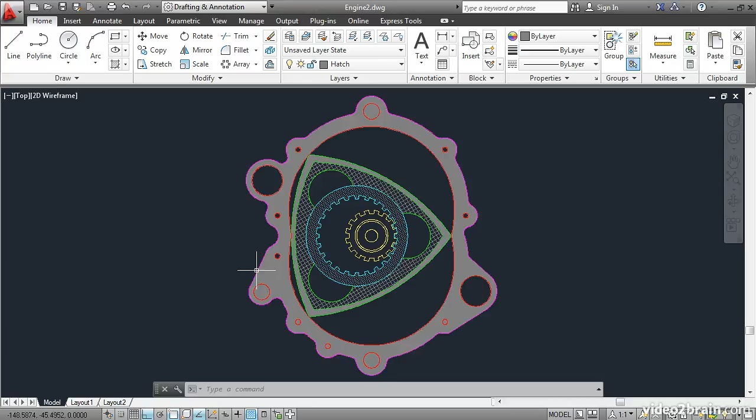Here you will edit existing hatch objects by selecting new boundaries, changing patterns, adjusting pattern scale, and setting the origin of a pattern. Open the Engine 2 project file and select this outer boundary. It appears that we're missing some of the circles. Let's reselect the missing boundaries.

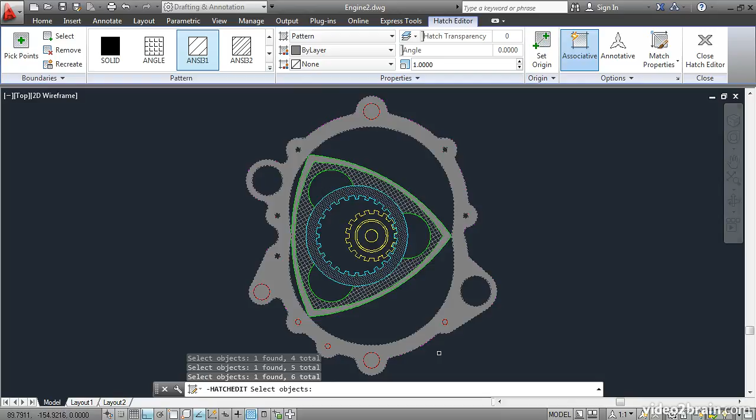Click Select, and then go around and select any of the circles which aren't part of the pattern. Note that you don't need to select the existing boundaries, just the additional boundaries. Press Enter, and the holes are cut in the pattern.

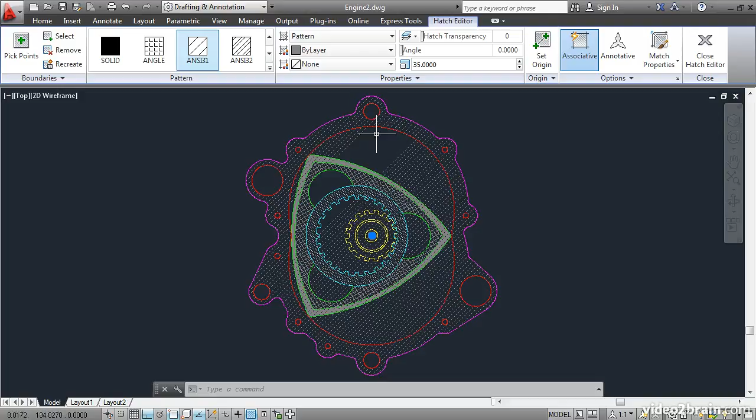The next thing I'd like to change is the scale of this particular pattern. It's way too dense. Go up here and highlight this value. Let's increase it to 35. Press Tab. Now look at this, we have a problem. The hatch pattern isn't respecting this inner boundary.

This inner boundary is composed of two circles and two blended curves here and here. There aren't any gaps in the boundary, so this is really a bug in AutoCAD. This happens from time to time with complex boundary shapes. The solution is simply to change the scale until the problem goes away.

I'll click on this Hatch Pattern Scale up arrow, and hopefully at some point, there we go, the boundary will be corrected. A value of 53 seems to work pretty well here. Let's change the hatch pattern next. Choose ANSI 32 for this steel pattern.

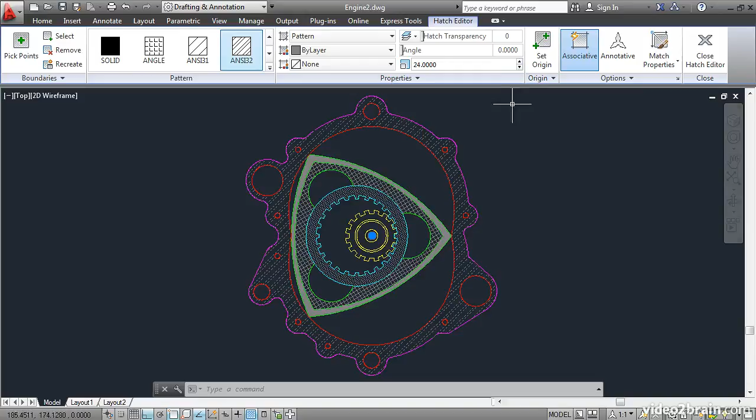And let's try a different scale. Maybe this pattern won't suffer from the same problem as ANSI 31. I'll decrease the scale, and sure enough, it does work. I'll bring it down to about 24, and then click Close Hatch Editor.

Next, let's zoom in and take a look at the way that this hatch pattern meets the boundary. Let's say you want the hatch pattern to meet exactly at this point. You can do that by selecting the pattern and then choosing Set Origin here. Click the point you want the pattern to meet, and one of the lines hits that point precisely.

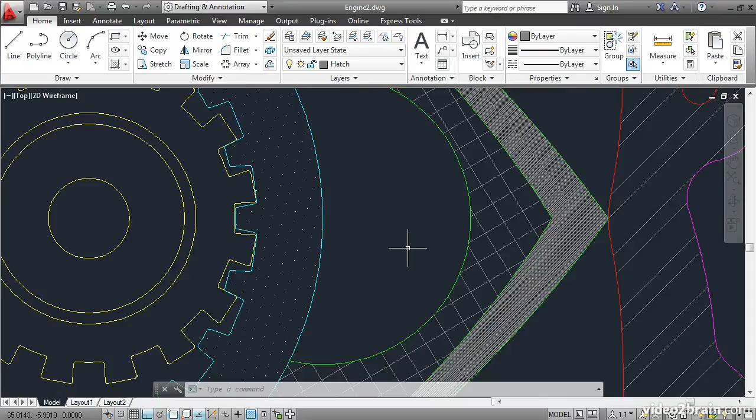Click Close Hatch Editor. Now let's create a new hatch pattern and match it to an existing hatch. Click the Hatch tool on the Draw panel. Click the Select button in the Boundaries panel. Click this circle and this outer boundary, and then click Match Properties. Click on this hatch pattern, and you immediately match all the properties that are set for it.

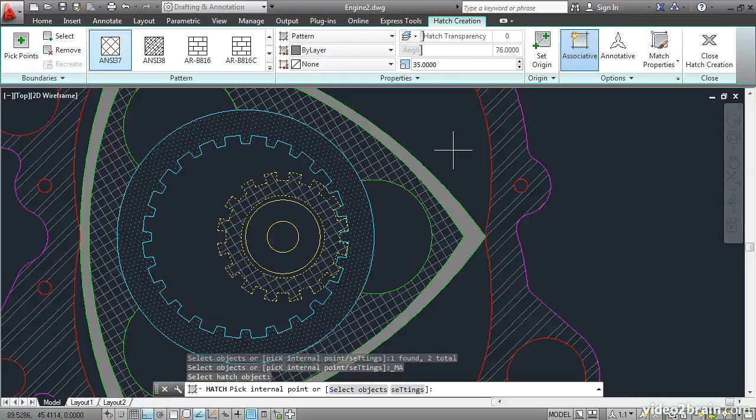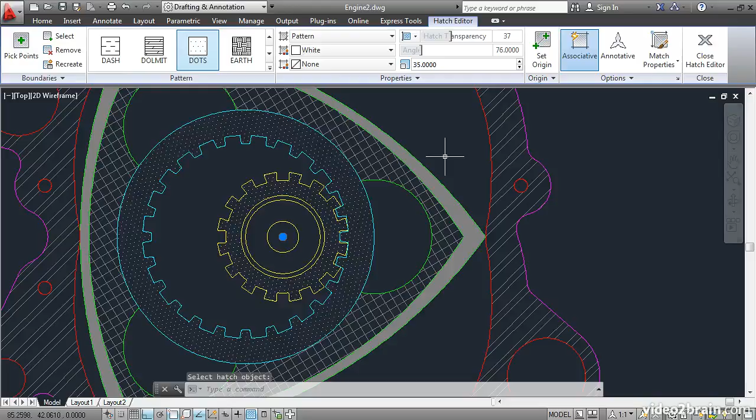Click Close Hatch Creation. I don't think I like that because the cross-hatching pattern is interfering with the complexity of the gears. So I'll select this pattern, and again, click Match Properties, and let's match the properties to a different pattern. Let's try this dots pattern. Now that looks better. I'll click Close Hatch Editor and Zoom Extents.

So you've learned how to edit existing hatches and have adjusted their boundaries, patterns, and properties. You also changed the origin point of a pattern and matched a new pattern to the properties of another existing pattern.